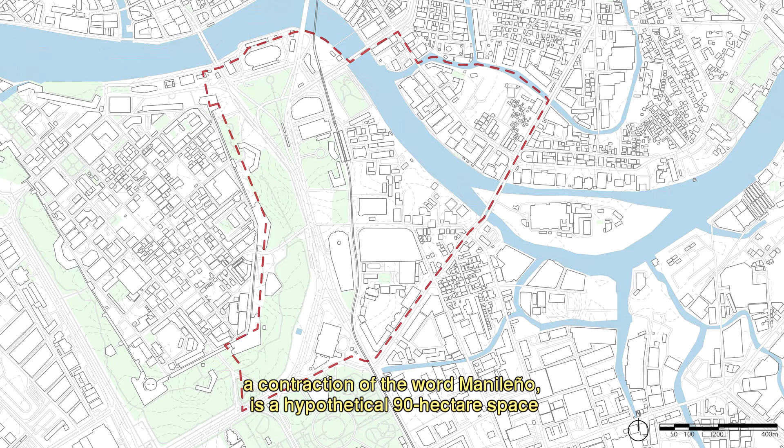CIRCULENOS, deriving its name from a combination of circulus, or circle, and leno, a contraction of the word Manileño, is a hypothetical 90-hectare space in Manila designed by consciously adopting aspects of Daniel Burnham's plan for Manila while integrating ideas that can address the modern demands of a city.

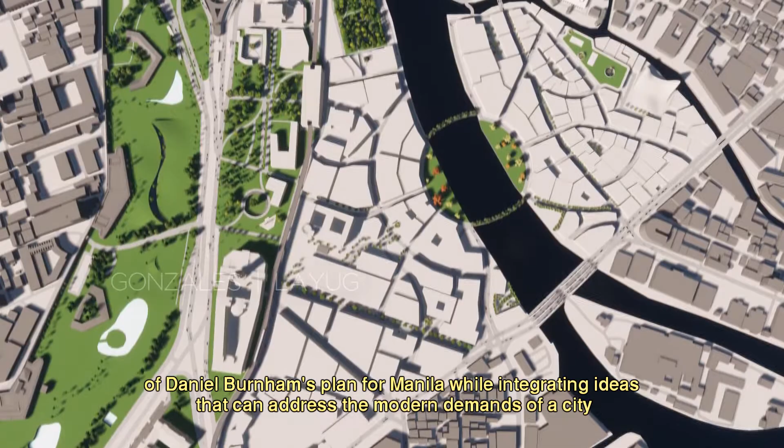My name is Jacob Layug, and with me is Adrius Gonzales, and this is our project CIRCULENOS.

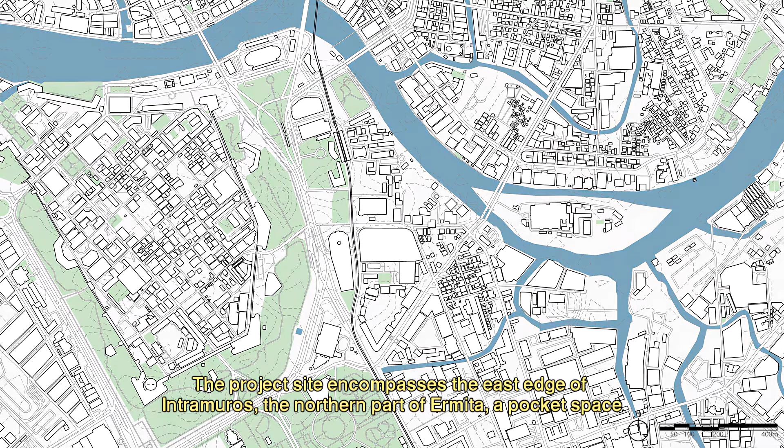The project site encompasses the east edge of Intramuros, the northern part of Ermita, a pocket space of southwest Quiapo just beside Quezon Bridge, and the west part of San Miguel, Manila.

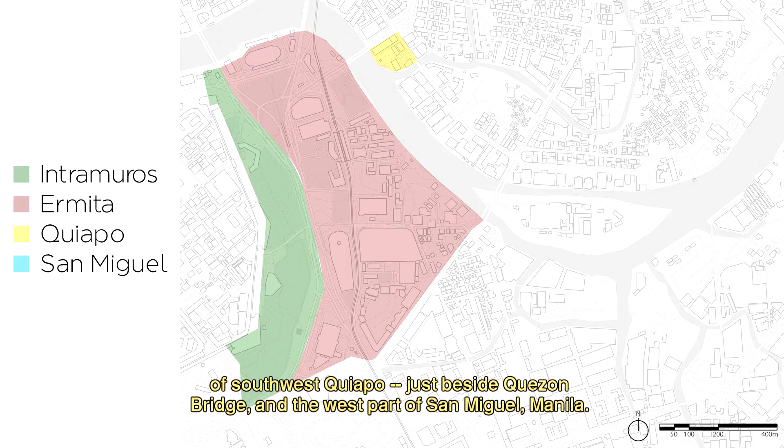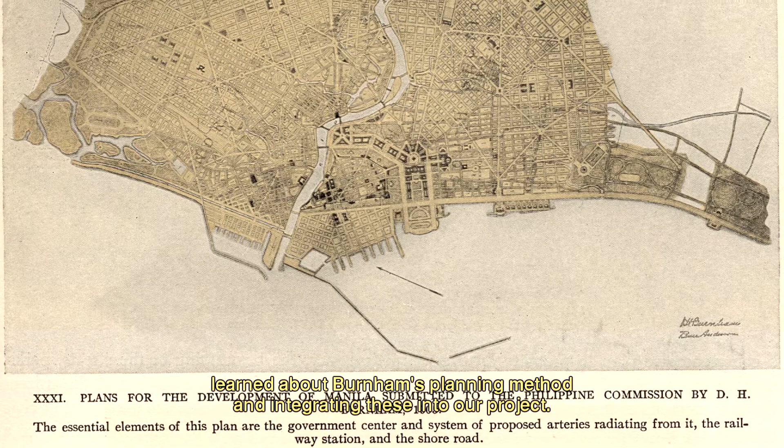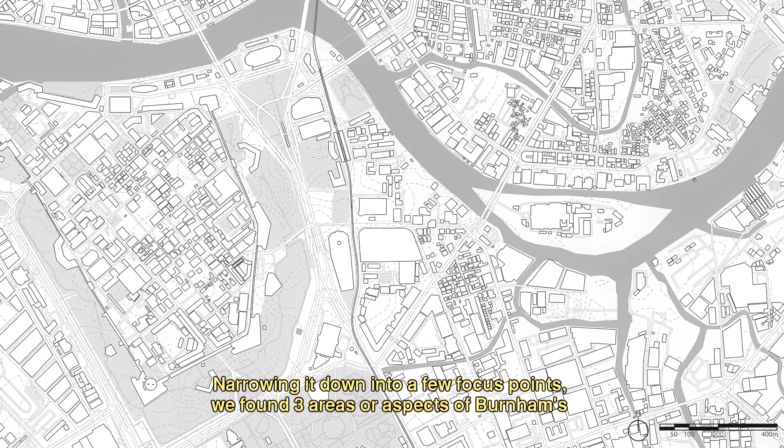Our approach in designing our vision of the space in Manila started with defining applicable principles from what we learned about Burnham's planning method and integrating this into our project. Narrowing it down, we found three areas of Burnham's planning to integrate: accessibility, homogeneity, and beauty.

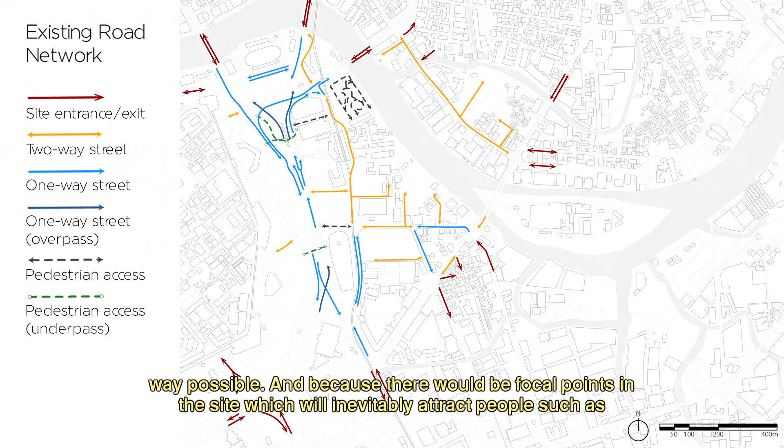Accessibility was all about creating a road network that ensures people can go from one place to another in the most efficient way possible. Because there would be focal points in the site which will inevitably attract people, such as civic centers and parks, we wanted to employ Burnham's radial and circumferential roads.

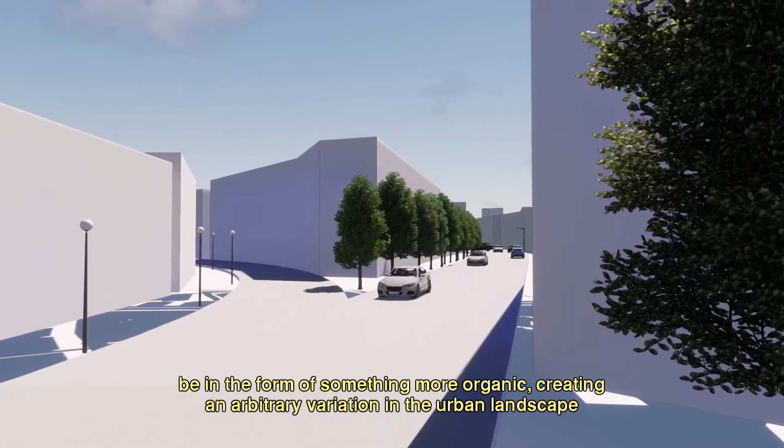But our design process included emulating the growth of tree roots spreading from a designated focal point. This is so that our version of the radial and circumferential roads could be something more organic, creating an arbitrary variation in the urban landscape.

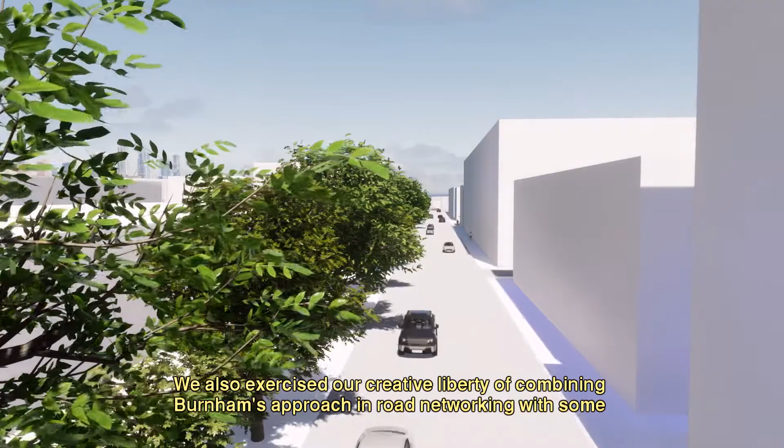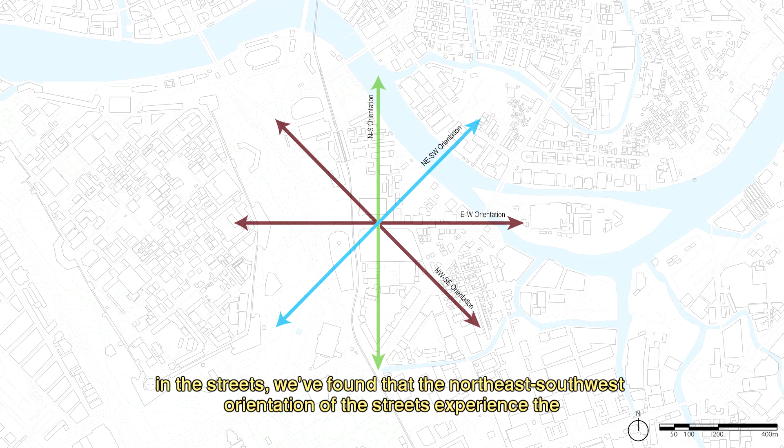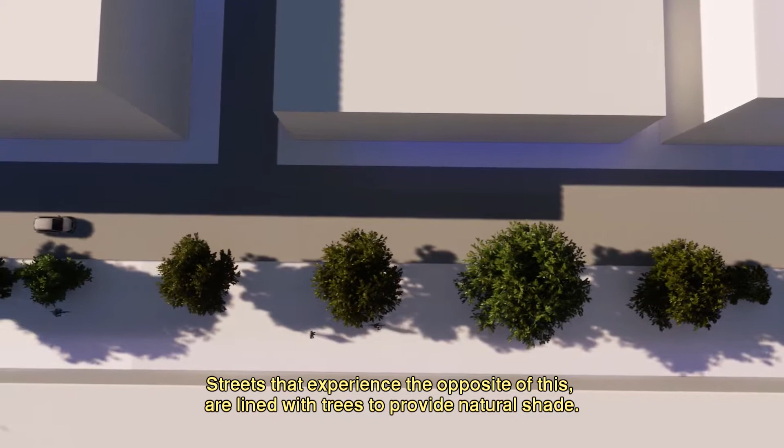We also exercised our creative liberty of combining Burnham's approach to road networking with some understanding of thermal comfort. By keeping in mind the way the sun and wind might affect the general temperature in the streets, we found that the northeast-southwest orientation of the streets experienced the best thermal comfort because of how it balanced solar exposure and wind permeability. Streets that experience the opposite of this are lined with trees to provide natural shade.

Pasig River also plays a role in cooling the streets that are oriented away from the direction of the general wind flow. The second principle, homogeneity, comes from the idea of Burnham's arrangement of space.

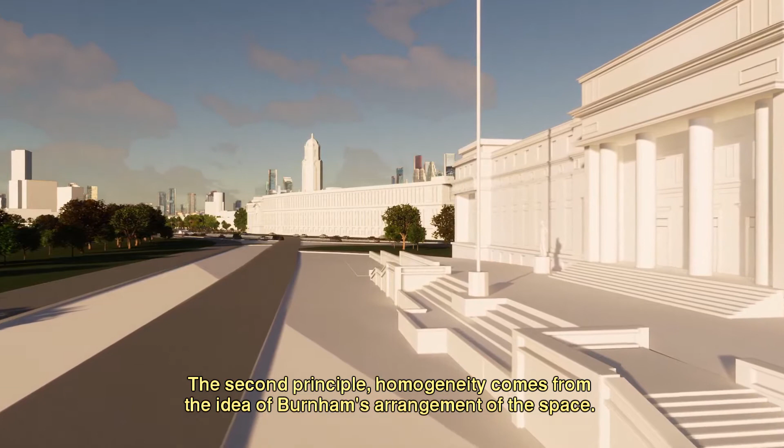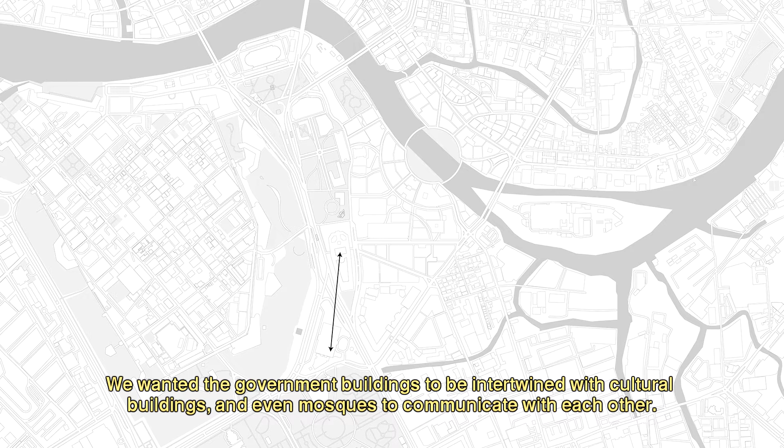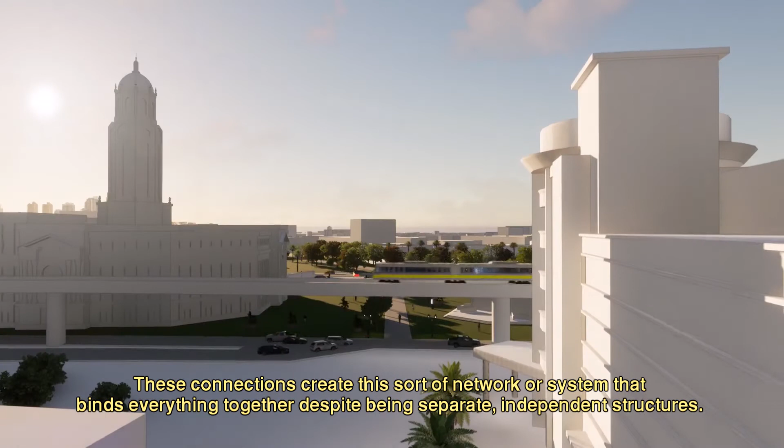Burnham's master plan of Manila included a cultural and civic center organized for specific purposes. We wanted to emulate this in a sense that we wanted buildings to communicate. We wanted government buildings to be intertwined with cultural buildings and even mosques to communicate with each other. These connections create a network or system that binds everything together despite being separate, independent structures.

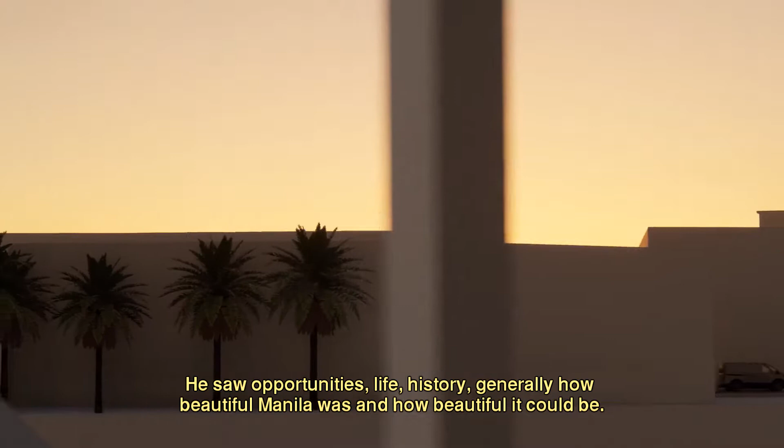Finally, beauty addresses the life of the city. We wanted our reimagination of Manila to exhibit the romantic qualities that Burnham saw. He saw opportunities, life, history, generally how beautiful Manila was and how beautiful it could be.

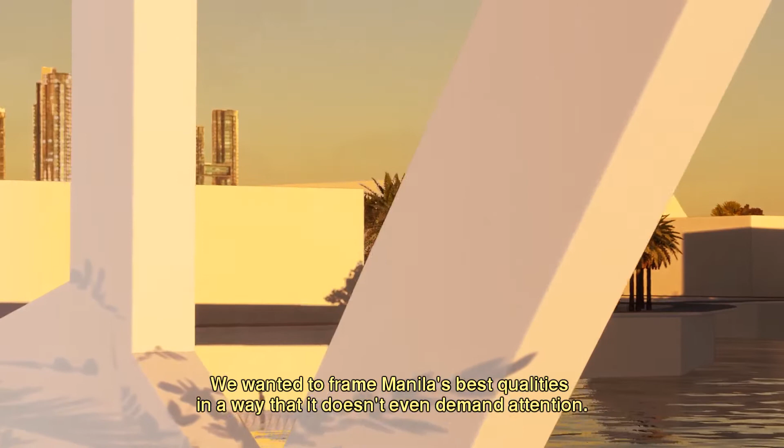While today Manila still holds the charm it always had, we wanted to enhance this by ensuring that things that should be seen can be seen. We wanted to frame Manila's best qualities in a way that it does not even demand attention.

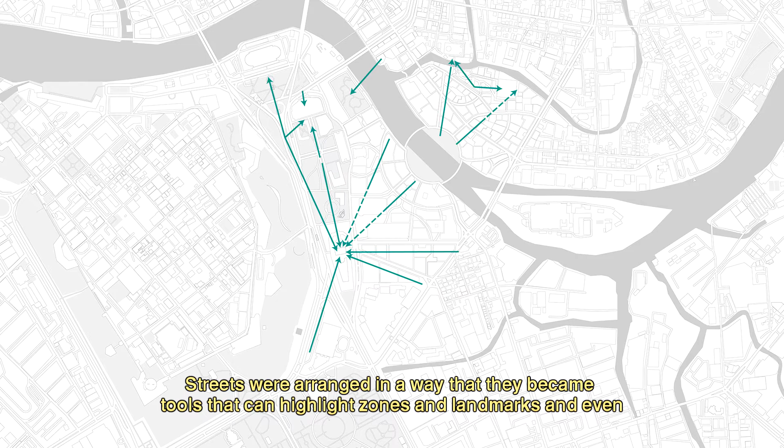Streets were arranged in a way that they became tools that can highlight zones and landmarks, and even make these things communicate with users, passersby, and even other structures.

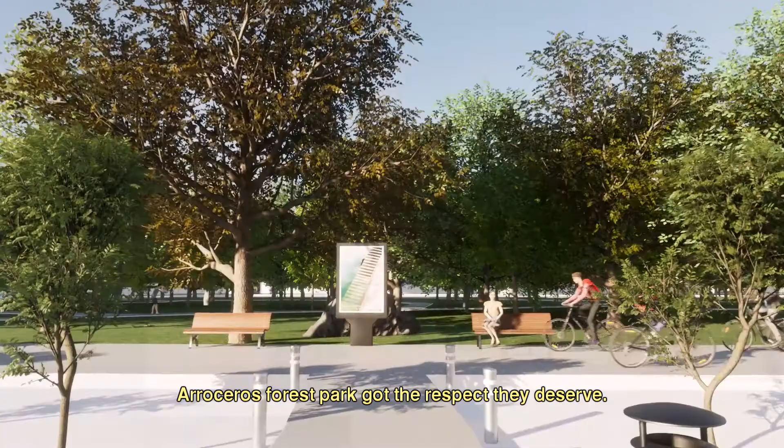We made sure that heritage buildings, other structures of significance, and even Pasig River and Arroceros Forest Park got the respect that they deserve. We wanted buildings of cultural importance to be seen from several spots in the site, sometimes imposing, sometimes modest and charming.

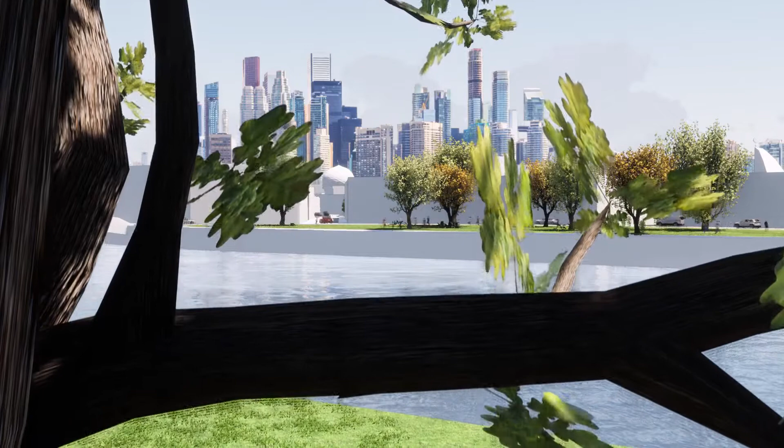Beauty, as one of our principles, aims to protect these elements by fostering appreciation and respect for them.

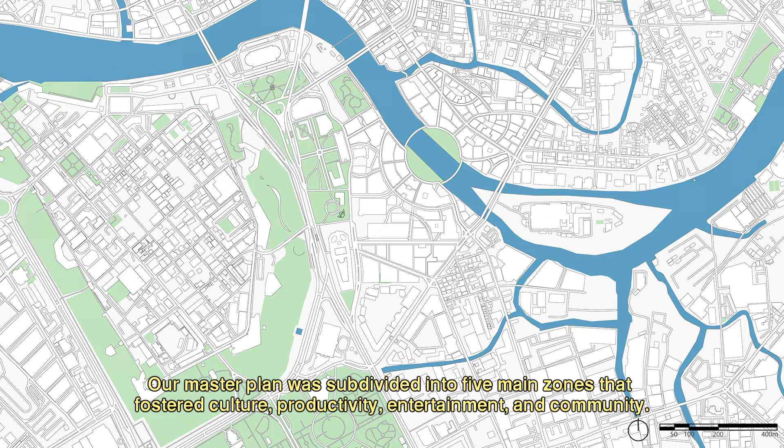Our master plan was subdivided into five main zones that fostered culture, productivity, entertainment, and community. The assignment of these zones is according to the need for adjacent amenities such as transportation and religious structures.

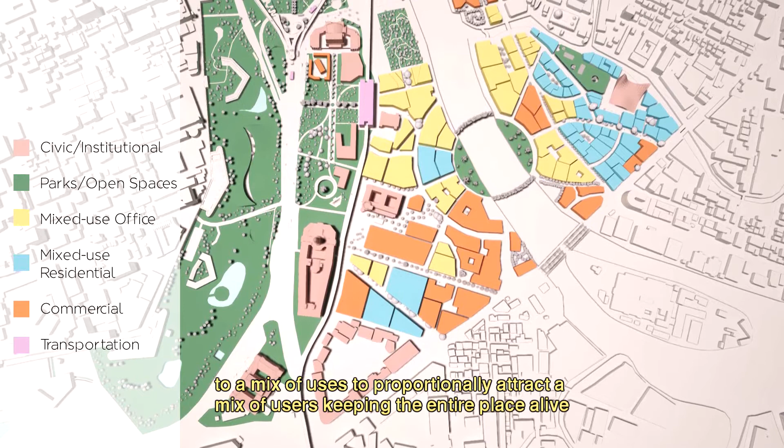But despite being subdivided into general purposes or groups, these zones still cater to a mix of uses to proportionally attract a mix of users, keeping the entire place alive even during shifts in calendar days such as weekdays versus weekends, or shifts in day and night cycles.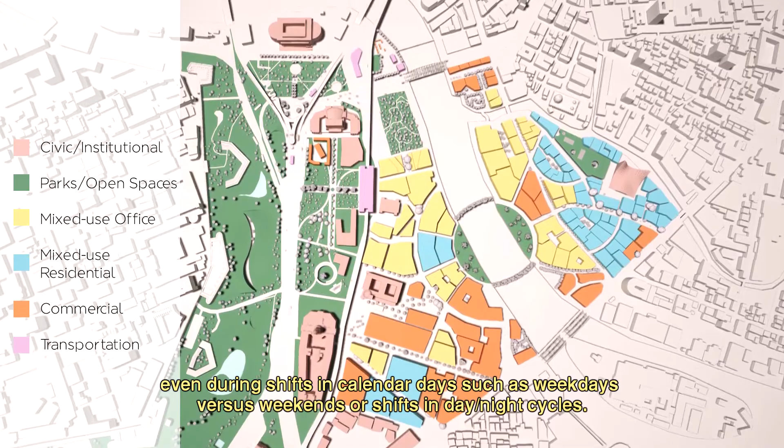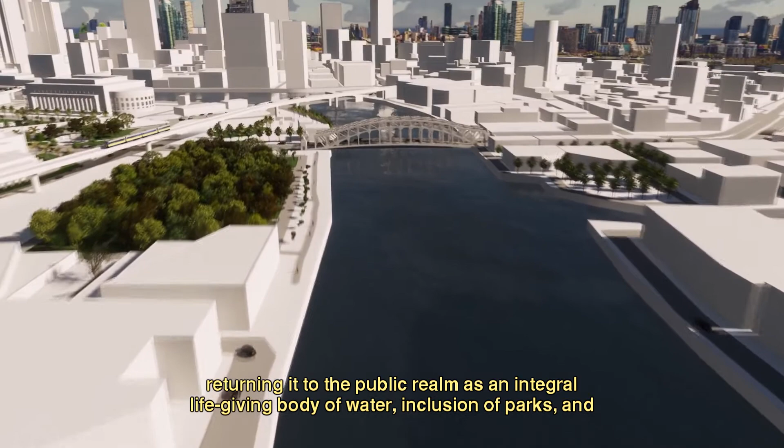A few of the most important physical features of the plan that also pay homage to Burnham are the reintroduction of Pasig River, returning it to the public realm as an integral life-giving body of water, the inclusion of parks, and the previously mentioned modified radial street system that branches out from designated focal points in the site.

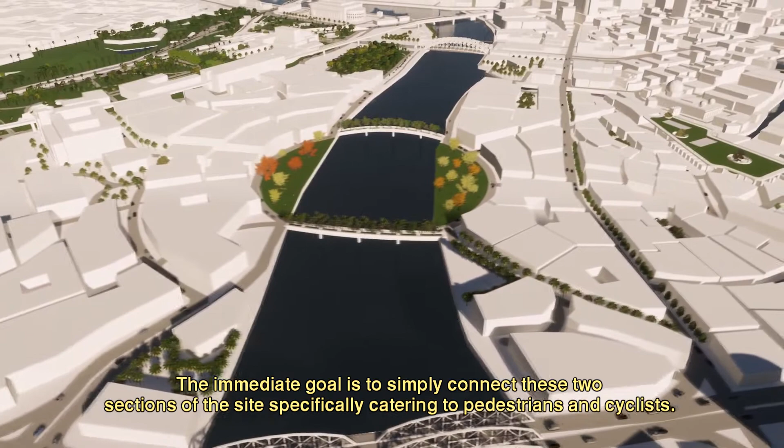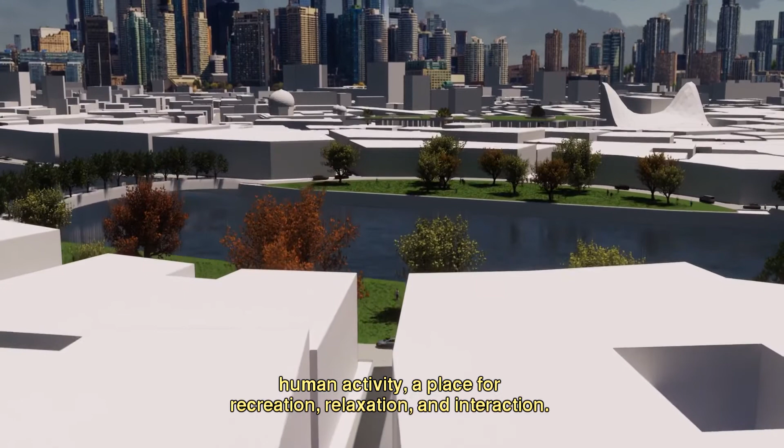The culmination of these physical features direct to our introduced Pedestrian Bridge, situated between Ayala Bridge and Manuel L. Quezon Memorial Bridge. The immediate goal is to simply connect these two sections of the site, specifically catering to pedestrians and cyclists. However, we found the inclusion of this pedestrian bridge as an opportunity to introduce a central, circular park that focuses on human activity, a place for recreation, relaxation, and interaction.

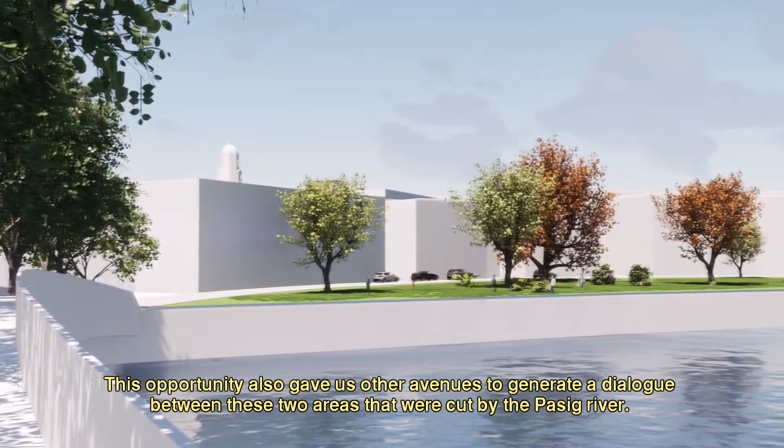From this park, the Manila City Hall Clock Tower and San Miguel Minaret can be seen. These two structures became placemaking tools identifying Ermita and San Miguel respectively. This opportunity also gave us other avenues to generate a dialogue between these two areas that were cut by the Pasig River.

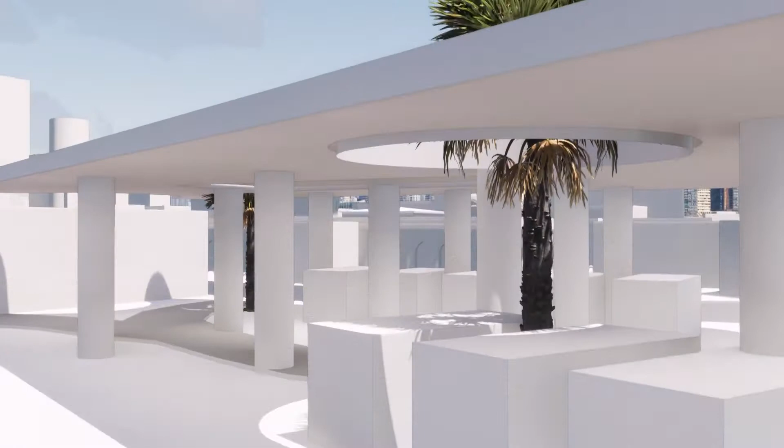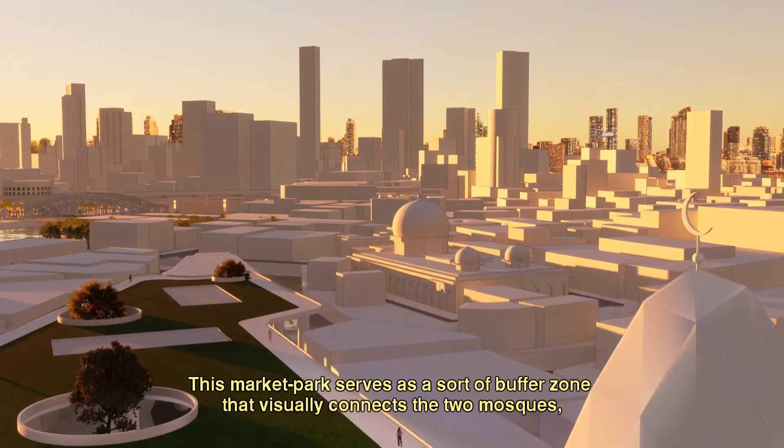Having these common spaces unifies this area, creating a sense of tangible community despite a large gap between them. This goal of unification through creating loops and connections between spaces were also exhibited through our Halal Market, topped with a park. This market park serves as a buffer zone that visually connects the two mosques, or rather, the two Muslim communities separated by Estero de San Miguel.

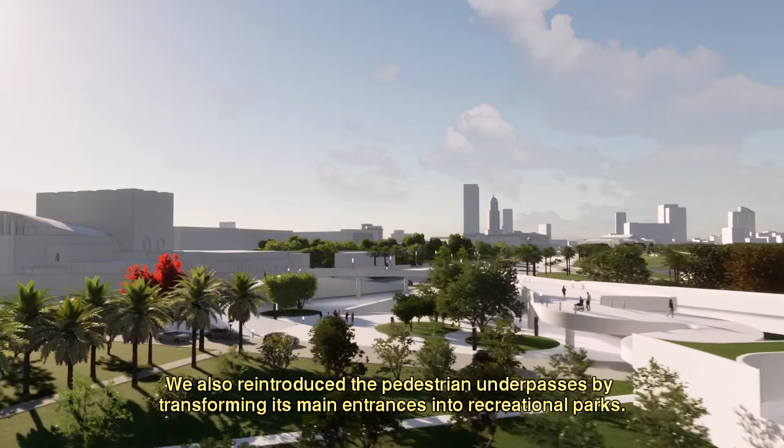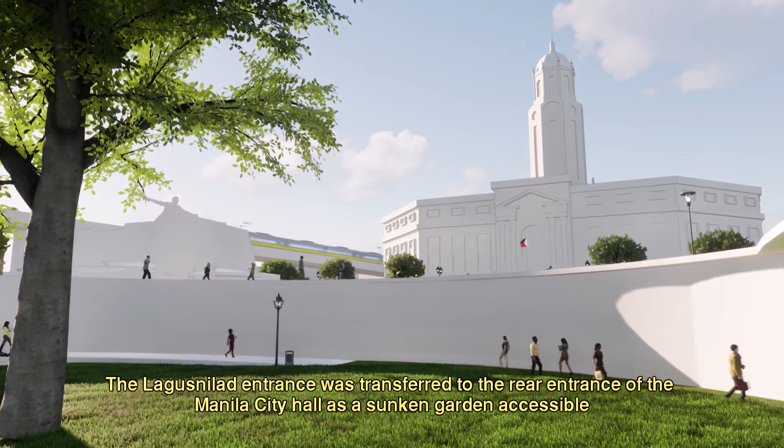We also reintroduced the pedestrian underpasses by transforming its main entrances into recreational parks. The Lagusnilad entrance was transferred to the rear entrance of the Manila City Hall as a sunken garden accessible via a spiral ramp with a sunken garden at its center.

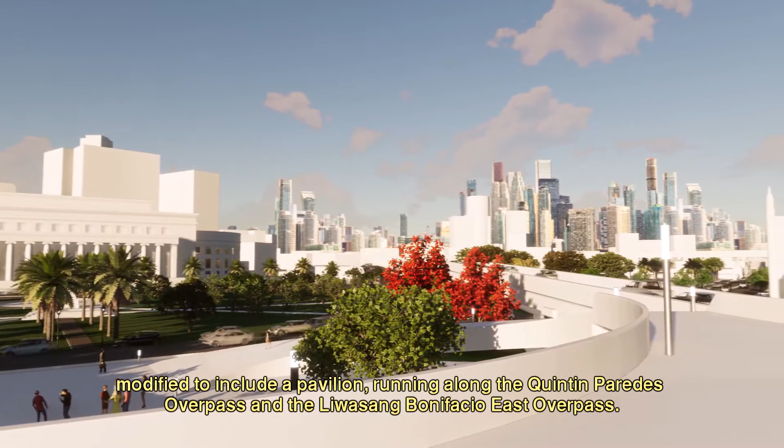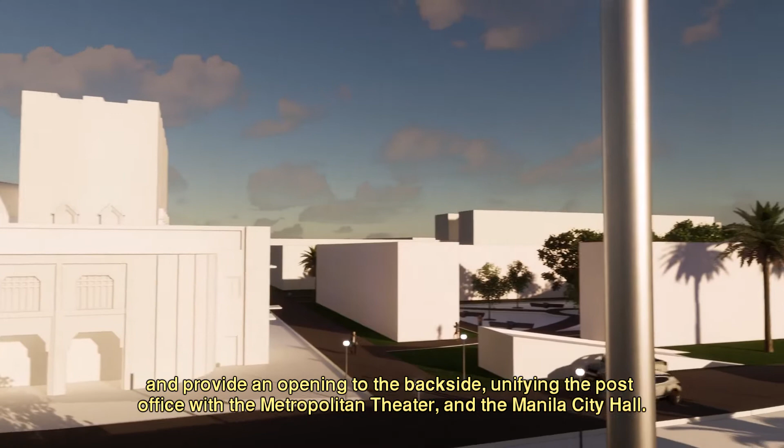The Loton entrance at the center of Taft Avenue was modified to include a pavilion running along the Quintin Paredes overpass and the Liwasang Bonifacio East overpass. The idea of this pedestrian bridge is to cradle the space and provide an opening to the backside, unifying the post office with the Metropolitan Theater and the Manila City Hall.

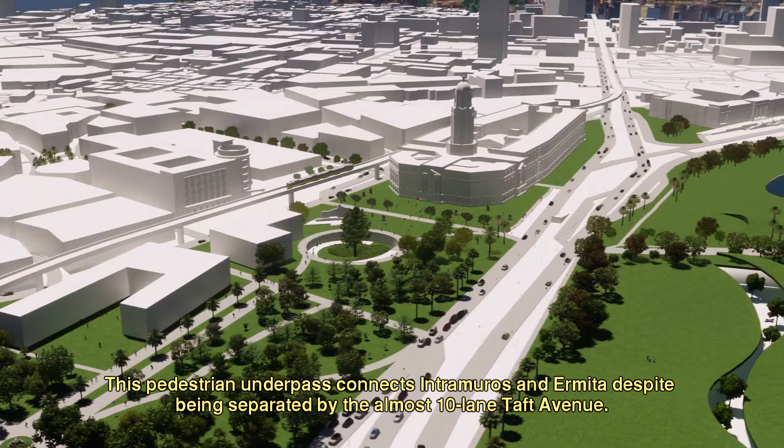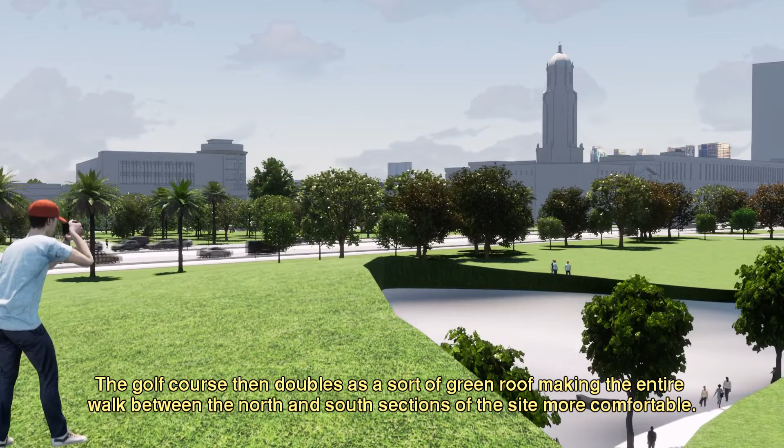This pedestrian underpass connects Intramuros and Ermita despite being separated by the almost 10-lane Taft Avenue, with the consideration of making it more commercially available by using the space under the Intramuros Golf Course as an expansion of the underground market. The golf course then doubles as a green roof, making the entire walk between the north and south sections of the site more comfortable.

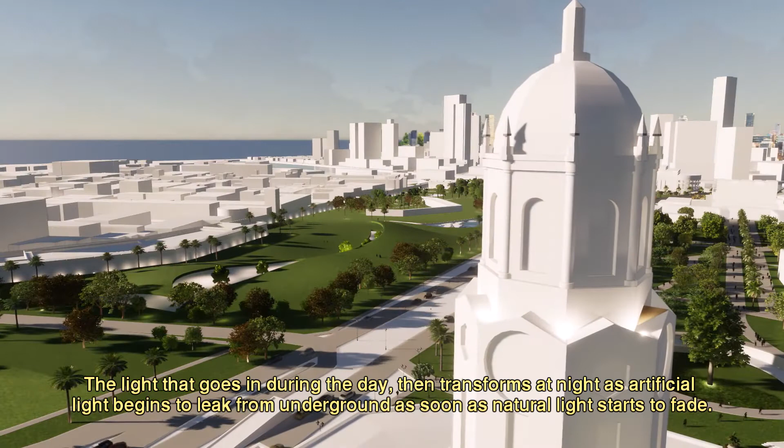Additionally, this underground market cuts the Intramuros golf course to introduce natural light leaking through the crevice, making underground feel less like underground. The light that goes in during the day then transforms at night as artificial light begins to leak from underground as soon as natural light starts to fade.

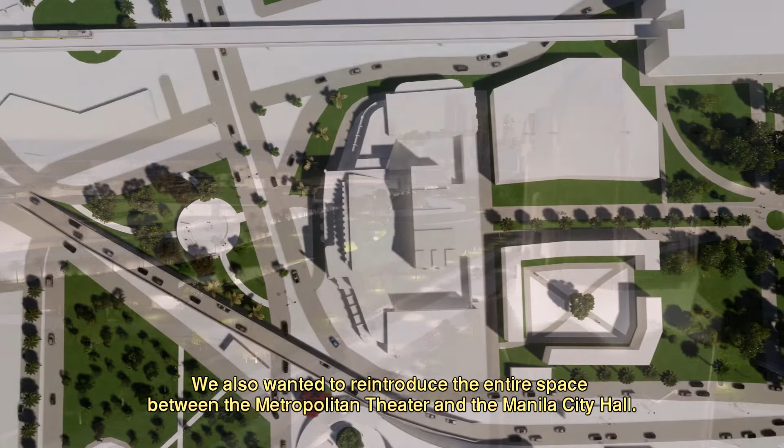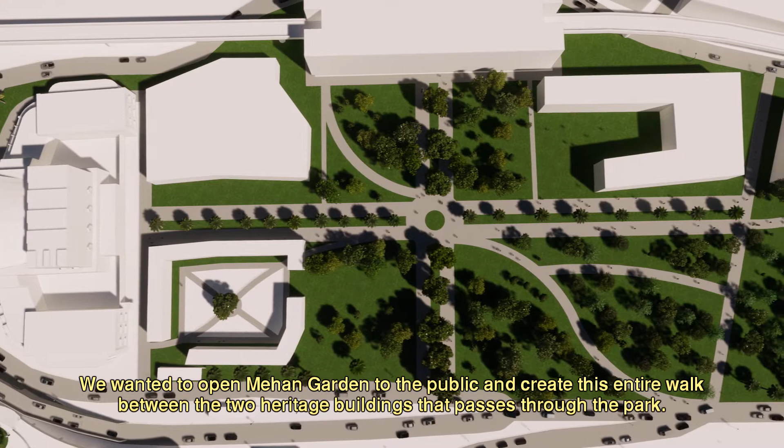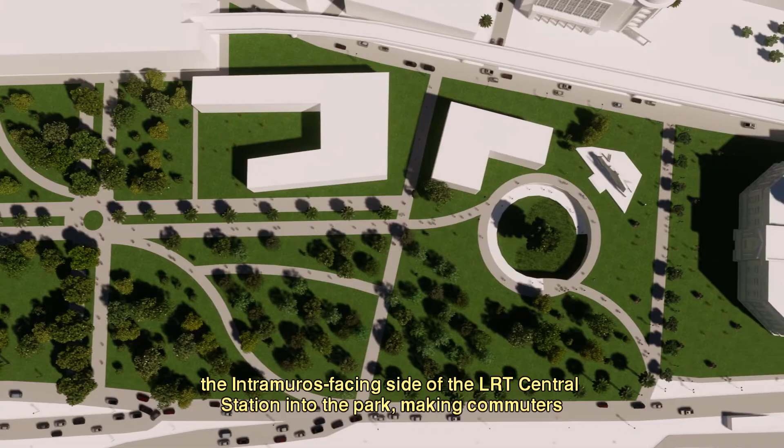We also wanted to reintroduce the entire space between the Metropolitan Theater and the Manila City Hall. We wanted to open Mehan Garden to the public and create this entire walk between the two heritage buildings that passes through the park. In doing so, we transferred one of the Universidad de Manila buildings to open the Intramuros-facing side of the LRT Central Station into the park, making commuters see the walls of Intramuros as soon as they leave the station, and enter and leave the station to Mehan Garden.

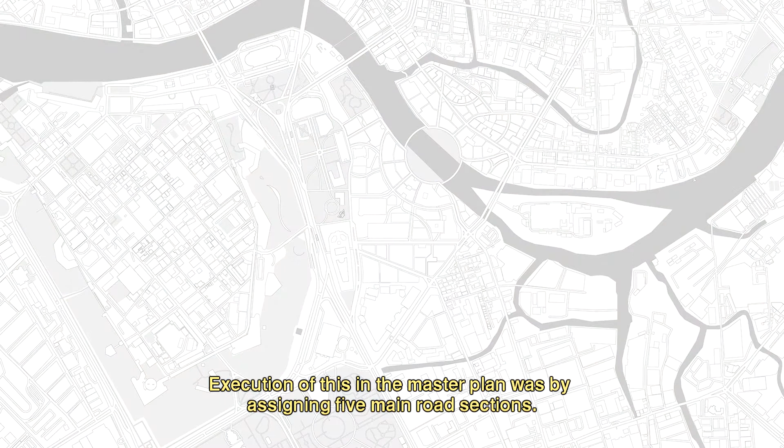Comfort of the pedestrians was of utmost importance to our plan. As Manila traffic is progressively getting worse, promotion of its walkability is more relevant than ever. Execution of this in the master plan was by assigning 5 main road sections. Each section serves a different purpose such as inclusion of space for extended commercial use, inclusion of vegetation space, and even having streets reserved for purely pedestrian use, requiring very little space.

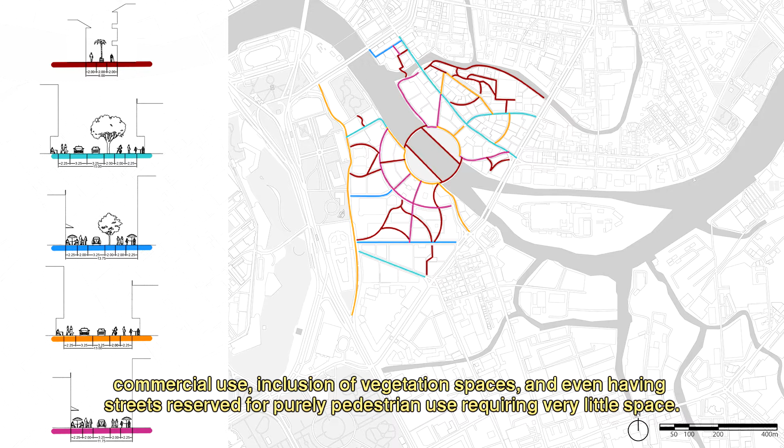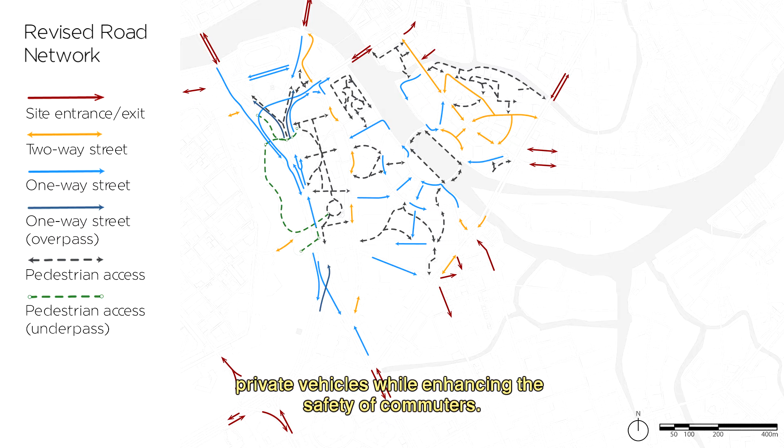A majority of these roads provide pedestrian-only access or one-way vehicular access. This helps regulate the influx of vehicles, promoting walking over taking private vehicles while enhancing the safety of commuters.

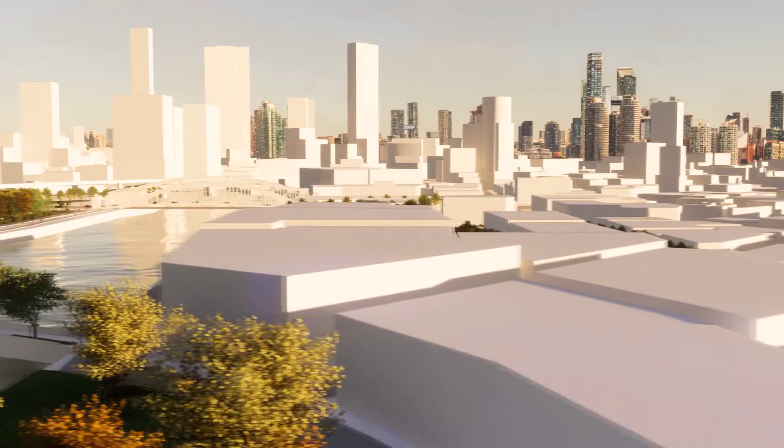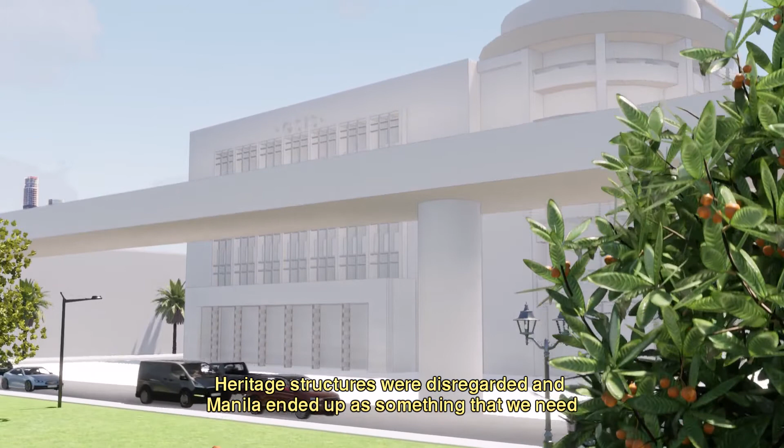Our entire project has been centered around trying to build between buildings and making them communicate. Just like this area in Manila, a lot of places in the Philippines already developed into car-centric places. Heritage structures were disregarded, and Manila ended up as something that we need to read about just to know why it's still worth keeping. It's been a victim of something like urban cynicism, and what we've been doing is an attempt to reverse that.

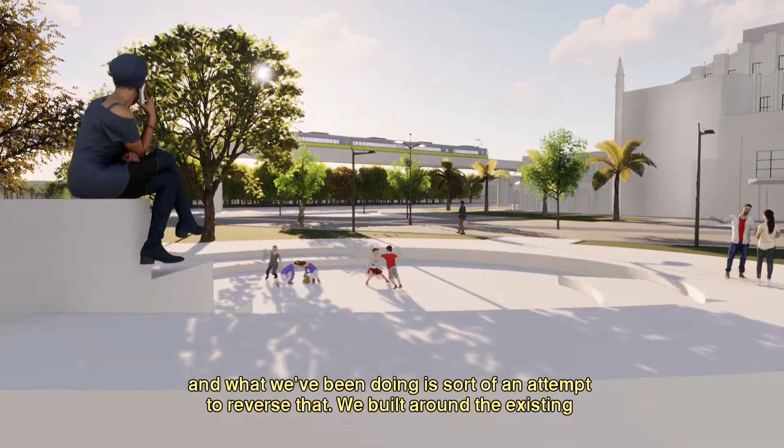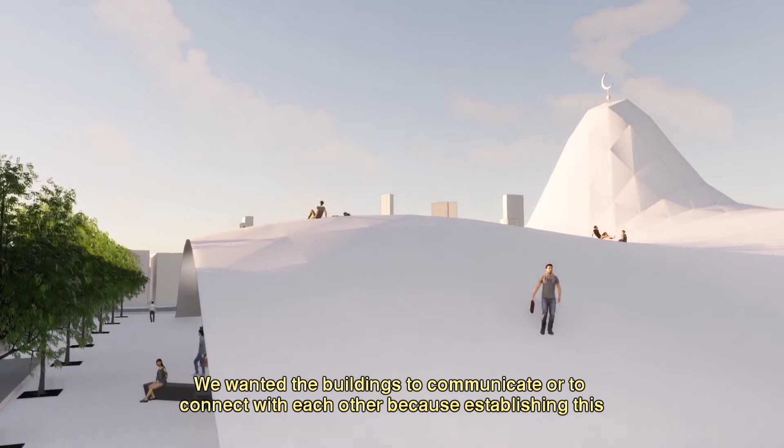We built around the existing because we believe that there's still so much to keep within the existing Manila. We wanted the buildings to communicate or to connect with each other because establishing this network of structures helps strengthen and homogenize the community. For instance, the overpass between Manila Post Office and Metropolitan Theater severed the dialogue between the two.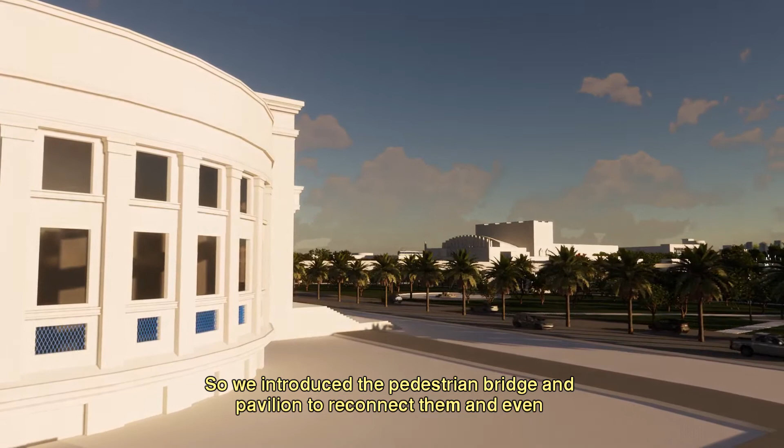So we introduced the pedestrian bridge and pavilion to reconnect them and even include the Manila City Hall and the walls of Intramuros. We used architecture to frame Manila the way we think it can be seen, by utilizing vistas and allowing the area to be written and seen in loops and lines, whether in street level or in an aerial perspective.

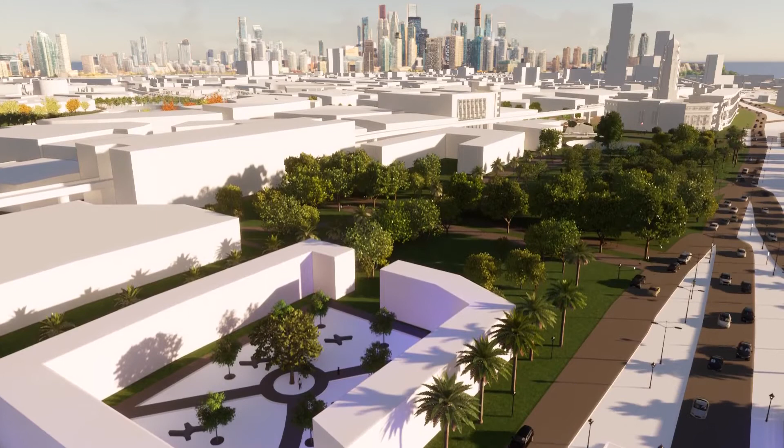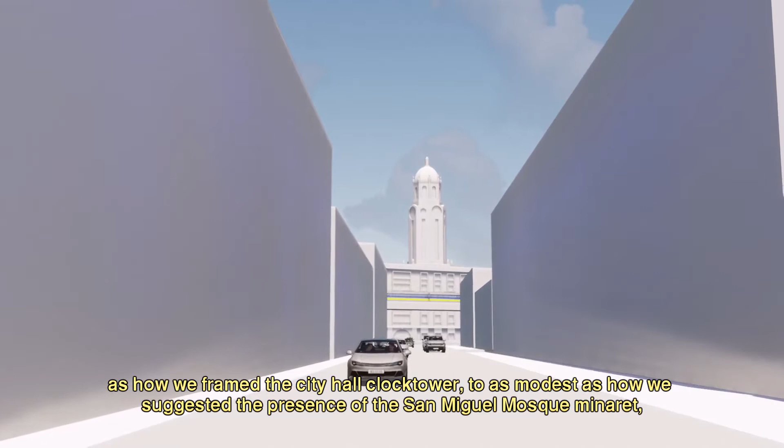From as explicit as how we framed the Manila City Hall clock tower and as modest as how we suggested the presence of the San Miguel Mosque minaret, these structures communicate with each other and ask for where the people are in this narrative.

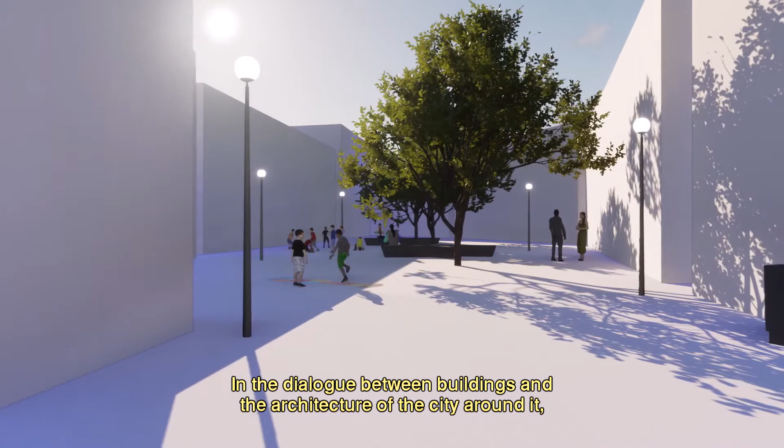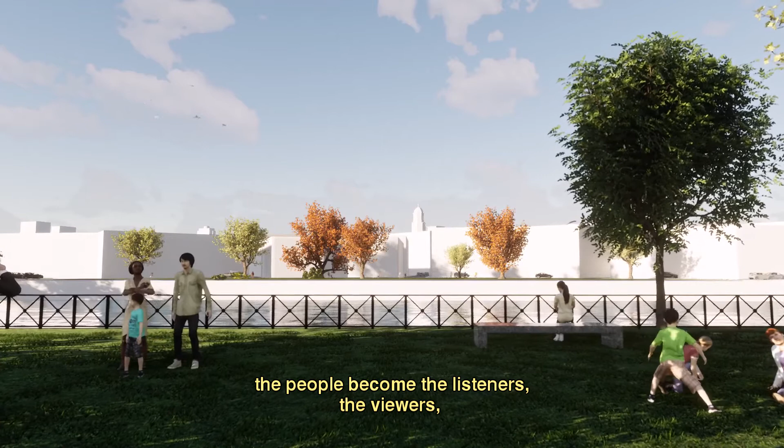In the dialogue between buildings and the architecture of the city around it, we want people to be situated between these conversations. In the picture of Manila that we're trying to paint, the people become the listeners, the viewers, and eventually the ones who will reciprocate these dialogues towards the protection, development, and the future culture of Manila's urban fabric.